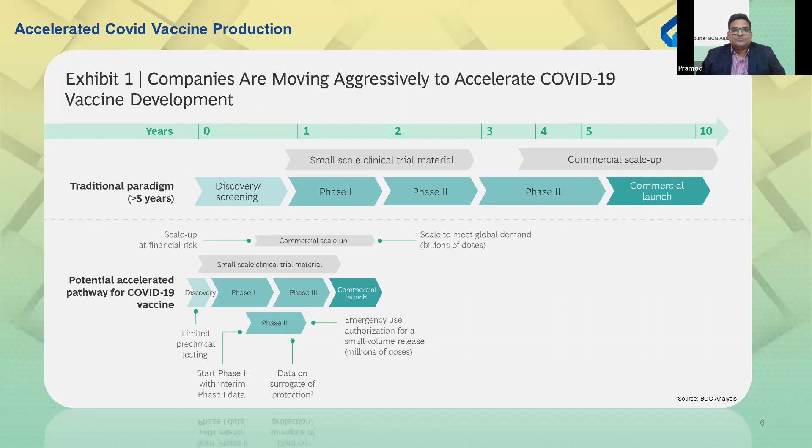So talking about different vaccine manufacturers, like Sputnik, or in India there are Covishield and Covaxin, which is a viral vector type of vaccine, and many countries were approved to produce the same vaccine to curb the spread of the corona pandemic. Across the globe, many more vaccines are practiced to control the corona infection. However, we need to understand what different coronavirus vaccines exist. So let's see the different coronavirus vaccines.

So basically, I would like to say that there is no laser pointer here.

So I would say there are direct action and indirect action coronavirus vaccines. In the case of the whole virus, which contains a weakened or inactivated version of the COVID-19 virus, this will be purified with the help of chromatography and chromatography resins. Those will be directly attenuated, so that they will have a controlled pathogenicity with the help of pharmaceutical excipients like preservatives. So, for example, dosage formulations in the form of vials or pre-filled syringes will be manufactured, and those will be directly injected into the human body.

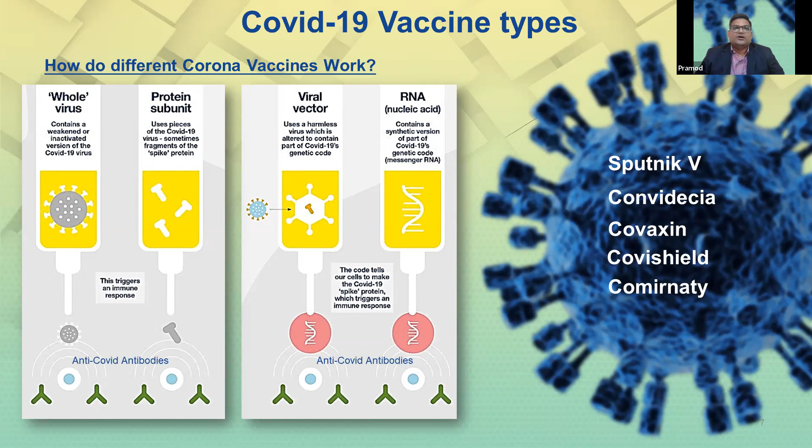mRNA vaccines do not use the live virus that causes COVID-19. The mRNA coronavirus vaccine is a kind of RNA or nucleic acid vaccine based on mRNA technology. It mainly introduces the mRNA encoding the virus S protein into human cells, letting human cells use the virus genetic information to produce the novel coronavirus S protein so as to stimulate the body to start the immune response. It does not affect or interact with our DNA in any way. mRNA never enters the nucleus of the cell, which is where our DNA is kept. The cell breaks down and gets rid of the mRNA soon after it is finished using the instructions.

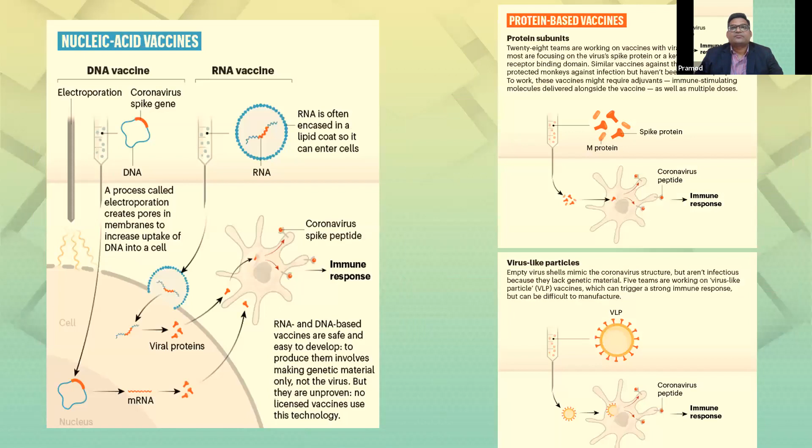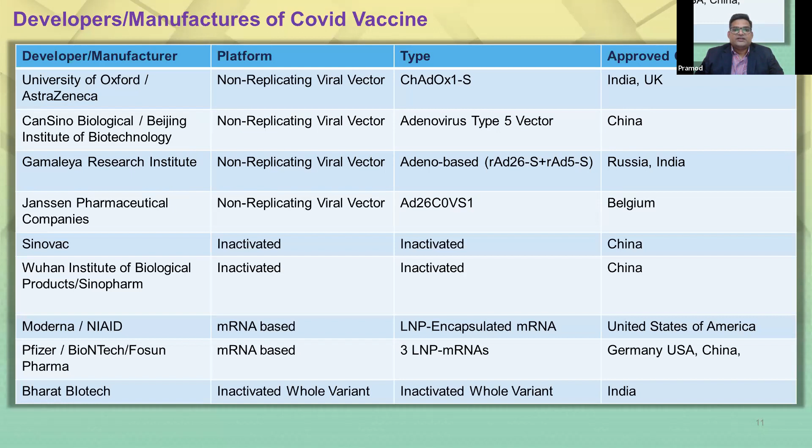Have a quick look at the list of COVID vaccine developers and manufacturers across the globe. Almost all biosimilar manufacturers have leaped into COVID-19 vaccine production. The vaccine categories include all the types of vaccines we discussed in previous slides, like mRNA vaccine, inactivated whole variant, viral vector, and some nasal sprays will also be available in coming days. Let us understand the common manufacturing processes involved in any type of vaccine manufacturing.

It always starts with the upstreaming of viral cultures. Nowadays, either stainless steel or single-use systems are used in the upstream processes. The main aim of the upstream processes is amplifying the viral count without losing the native form of the microorganism or virus. Once the fermentation time in the bioreactor is completed, we bring that protein soup or viral soup into further processing, and there might be some impurities. So we need to get rid of impurities, and because of that, the purification unit operations pitch in.

The first step will be cell lysis, either by homogenization or by other chemical processes, and then we can get rid of cell debris with the help of a continuous centrifuge or microfiltration with the tangential flow filtration method. Initially, the volumes are very high, maybe 5,000 liters or 10 KL, that is 10,000 liters. Handling these huge volumes is definitely a big task. To manage these volumes, we can reduce them with the help of ultrafiltration or affinity chromatography, that is protein A or protein G chromatography.

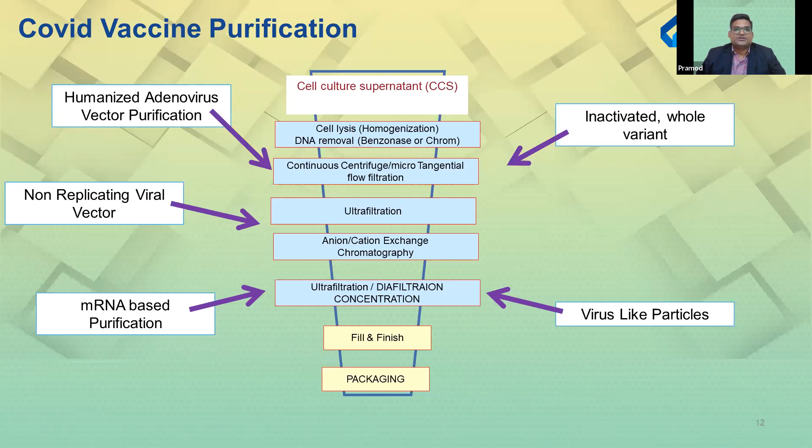After cultivation and reproduction of coronavirus, it is inactivated and then injected into the human body to stimulate our immunization. In China, there are many biosimilar manufacturers who have leaped into COVID-19 vaccine manufacturing and supplying them to different countries for better control over the pandemic. To name a few: China National Biotech Group, situated at Beijing and Wuhan, and a company called Sinovac, are involved in manufacturing COVID-19 vaccines.

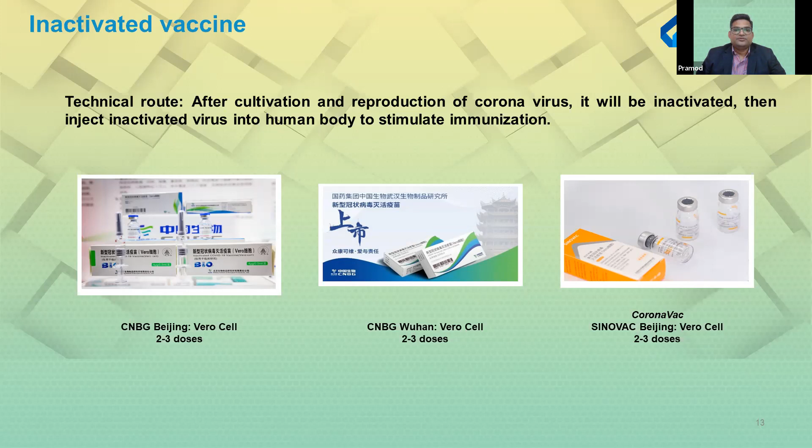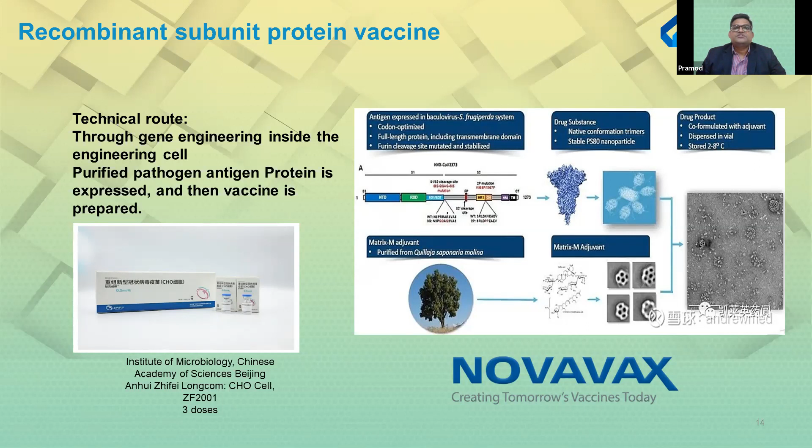In the case of recombinant subunit protein vaccines, the COVID-19 vaccine developed by Novavax is a recombinant subunit vaccine, meaning that SARS-CoV-2 components are created in the laboratory rather than isolated directly from the virus. The Institute of Microbiology, Chinese Academy of Sciences at Beijing and Anhui, are also involved in producing recombinant protein subunits which mimic the coronavirus, using a pathogenic fragment of it to give an immunogenic response in our body.

For example, AstraZeneca comes with this type of vaccine, approved in many countries to manufacture, like UK, China, India, and the United States of America as well. In China, Convidecia, CanSino Bio, also manufactures the recombinant adenovirus vector form of vaccine.

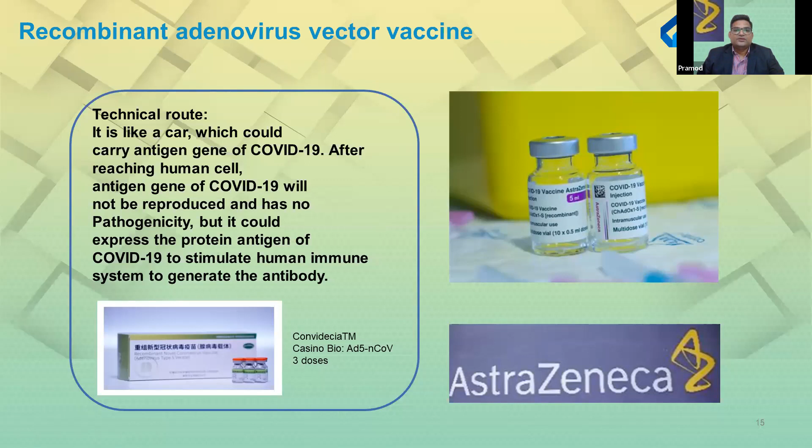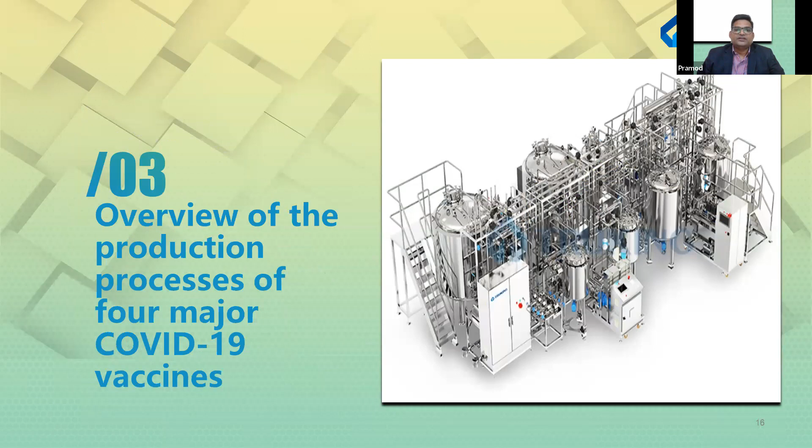Now, after giving a brief introduction about the different types of corona vaccines, let's see an overview of the production processes we discussed for COVID-19 vaccine manufacturing. This slide shows the manufacturing of inactivated vaccines.

The drug substance is created by first finalizing the cell lines, and there will be virus inoculation and fermentation of that viral culture in bioreactors, as I mentioned earlier, and further those are purified with unit operations like ultrafiltration and chromatography.

Further, the purified drug substance will be subjected to filling lines like ultrasonic cleaning, air injection, and pre-filled syringe filling lines. Those will again be transferred to the packaging lines, and TRUKING technology will help provide the filling lines and packaging lines as well.

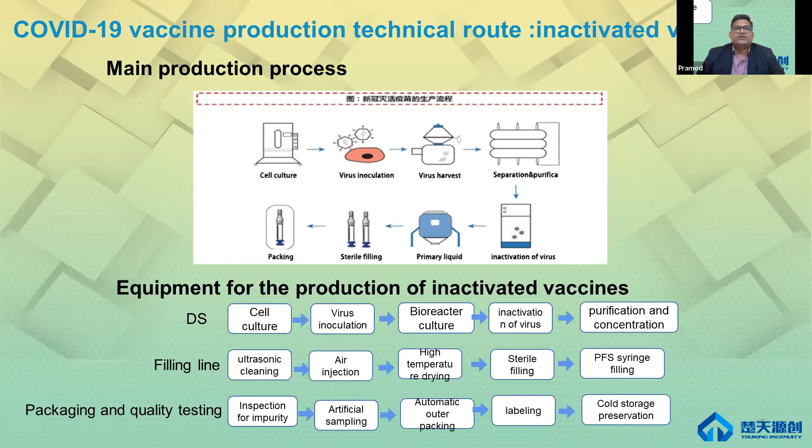Likewise, as we have just seen with inactivated vaccine manufacturing, the upstream process of vaccine manufacturing will be different, but the rest of the process will be the same. That will be downstream processing, and then the drug substance will be transferred to the filling lines and further for packaging and quality testing.

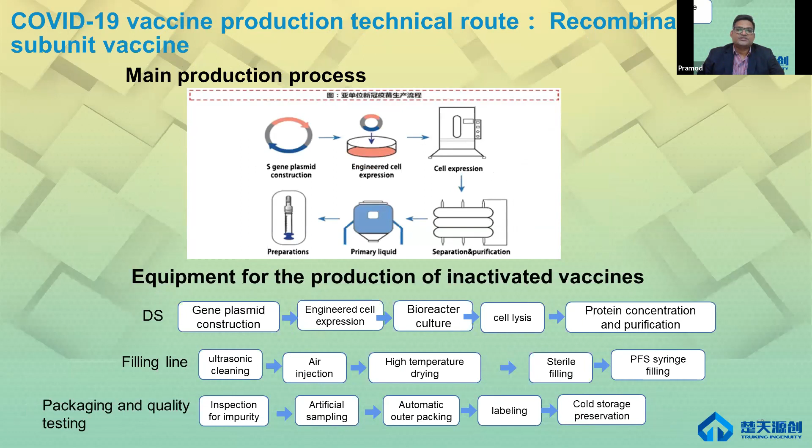In the case of mRNA vaccine production, as I mentioned, we need to select the target messenger RNA, which will eventually give an immune response through S protein production inside the body.

Then this particular mRNA will be amplified into multiple copies, and further those will be purified with the help of ultrafiltration and chromatography steps. After that, it will be transferred for lipid nanoparticle encapsulation technology to form the nanoparticles. The mRNA technology requires low temperatures to operate, and then the rest of the process of filling, packaging, and quality testing will be carried out.

So TRUKING technology is providing a one-roof solution for the entire process. Let's have a quick look at the entire process and offerings from TRUKING technology.

Talking about the overall process for vaccine manufacturing, there are different stages like media preparation and choosing the cell lines, creating the seed, and further seed amplification, or in the case of E. coli amplification, or viral cell culture amplification.

We provide various sizes of bioreactors, including stainless steel bioreactors, and we are well equipped to cater to biopharmaceutical companies with single-use bioreactors as well.

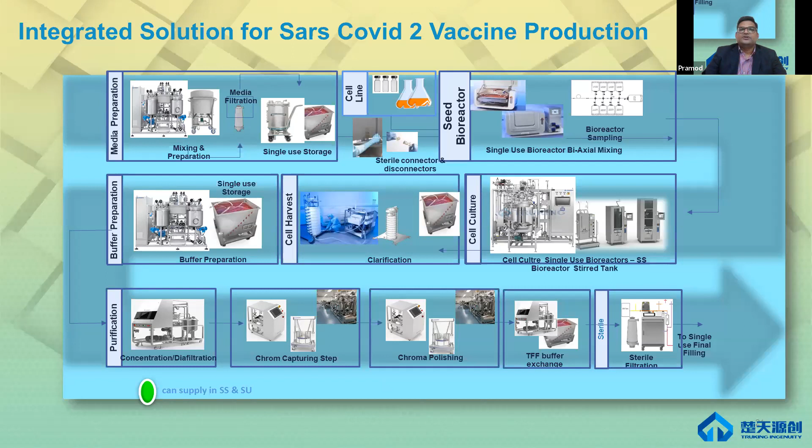I wanted to mention that the bioreactors or the chromatography systems provided by TRUKING technology can be supplied in terms of stainless steel, or as collapsible single-use bags.

Now let's study a case study for TRUKING technology. Let's take an example for vaccine manufacturing, where there will be upstream cell culture required, downstream purification, buffer preparation, and production preparation and filling.

TRUKING technology not only provides the hardware, but also process intensification equipment and technical support. TRUKING technology will also support you for your greenfield projects. In this project, we will guide you not only for the technical processes, but also the entire erection of a biopharmaceutical manufacturing facility. TRUKING will support you for the layout of your floor designs and optimum use of the facility.

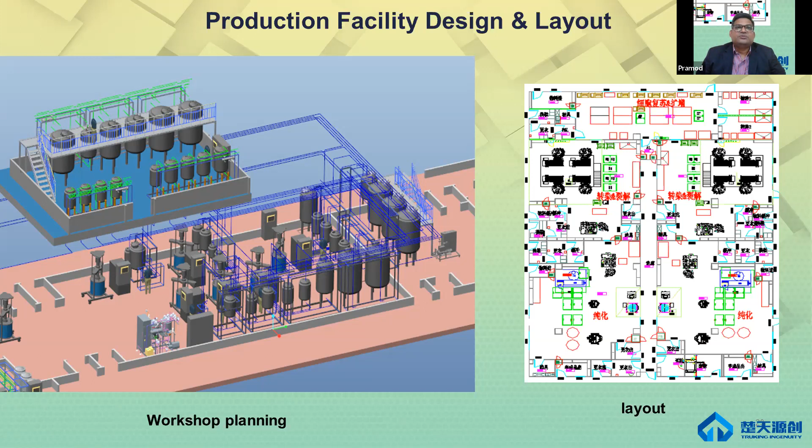This slide talks about the timeline required for each unit operation involved from upstreaming to the drug substance transfer. Initial inoculation will take around 2 to 7 days to grow into a good number. For further cell amplification into a seeding stage, it requires around 4 to 7 days, and the cells which are amplified will be put for the production scale, which will take around 7 to 9 days, or it depends on the cell line, going up to around 14 days as well.

Once this upstream batch is completed, at least around 2 to 3 days of time is required, as per the batch size and the level of purification. Then the drug substance so produced will be transferred to the filling lines and packaging lines.

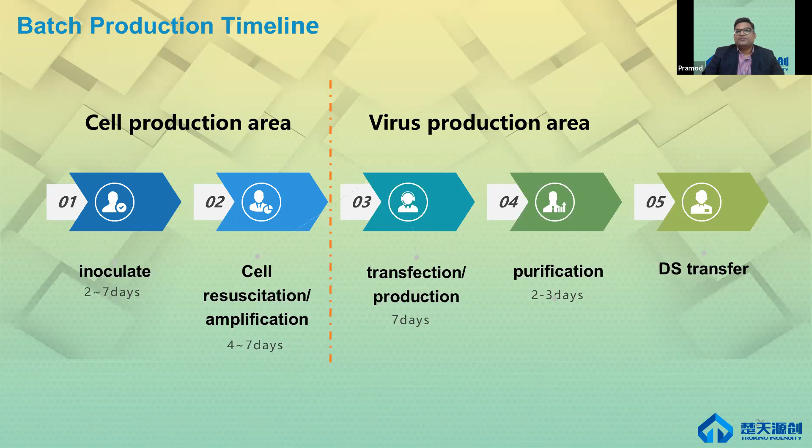Now, while doing the upstream or downstream processing, we need media. So media and buffer preparation are the basic unit operations in any biosimilar manufacturing, not only in vaccine manufacturing, but also in monoclonal antibody or insulin production. So we need media and buffer preparation there.

In case of cell seeding and amplification, which also requires media components and solutions like sodium hydroxide or sodium bicarbonate. For virus amplification, they require glucose solutions, acidic and basic solutions, and also surfactants like Tween 80 solutions.

For further processing of cell cultures like cell lysis, enzyme treatment, clarification, and CIP, that is cleaning in place for bioreactors as well as downstream equipment, we need buffers and CIP solutions. While talking about cleaning in place, that is the CIP, we widely use sodium hydroxide, which is cheap and very effective. Continuing with buffer preparation, likewise in upstream operations, we need buffers prepared for downstream operations as well.

For example, there are various phases of chromatography, and every phase of chromatography needs specific buffer requirements. Each chromatography run will have different phases like equilibration, sample loading, post-load wash. This post-load wash may involve wash 1 and wash 2, and further with the elution where your impurities and your protein of interest will elute out, followed by the cleaning in place of that particular chromatography resin.

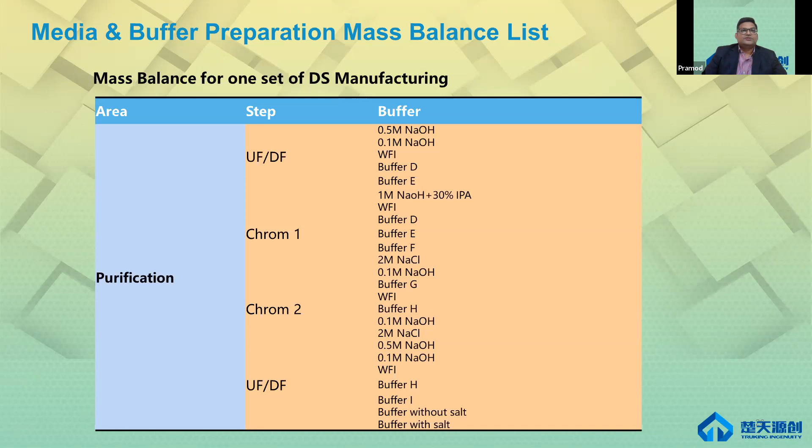So in the case of media preparation, what we need to do is weigh the media components, or nowadays premixes are also available, provided by vendors for your processes. Then we dissolve these into distilled or sterilized water, and all the components should be in sterilized conditions.

Once we have the sterilized media, we can put the cell culture media into storage, or pass it on to the reactor for fermentation processes. TRUKING technology will guide you, and we do have media preparation process equipment for your better use, so that it will not be a very time-consuming process, and you can be worry-free for your media preparation for every batch.

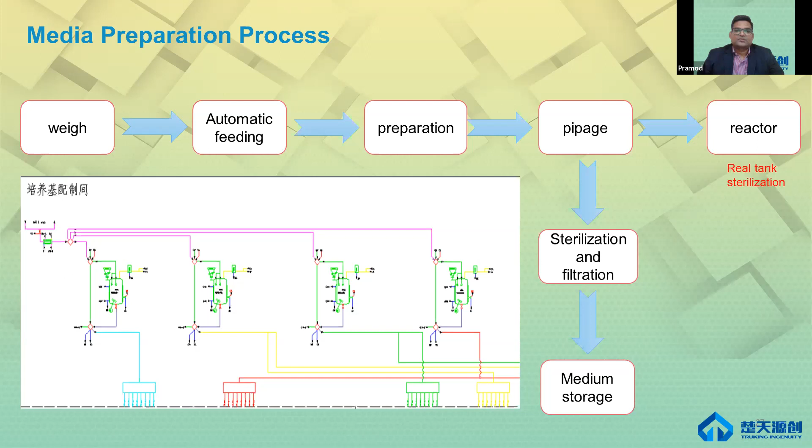Same as media preparation, we need to prepare the buffers for either upstream or downstream processes. The same process will apply: you weigh the buffer components, then dissolve them into deionized or sterilized water. To avoid further issues of increased pressure, it is better to get the buffers filtered through microfiltration units, and as and when needed, you can store it, transfer it to the above tanks, and carry out the operations.

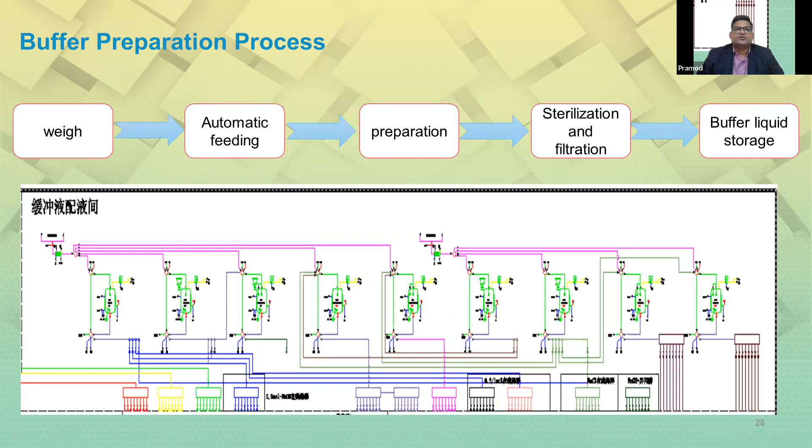The tough points in the buffer preparation process are mainly maintaining the media buffer preparation tanks, and cleaning and sanitizing them. It is a time consuming process. These are the major hurdles in day-to-day activity, and they definitely consume a lot of time, resulting in less productivity for your facility.

From TRUKING technology, what we can offer you is process intensification equipment, that is the buffer preparation hardware like liquid dosing systems and inline conditioning buffer preparation systems. There is hybrid technology like the inline conditioner buffer system, which is equipped with column valves and carries out the function of a chromatography system on these instruments. I will be talking about this equipment in the coming slides.

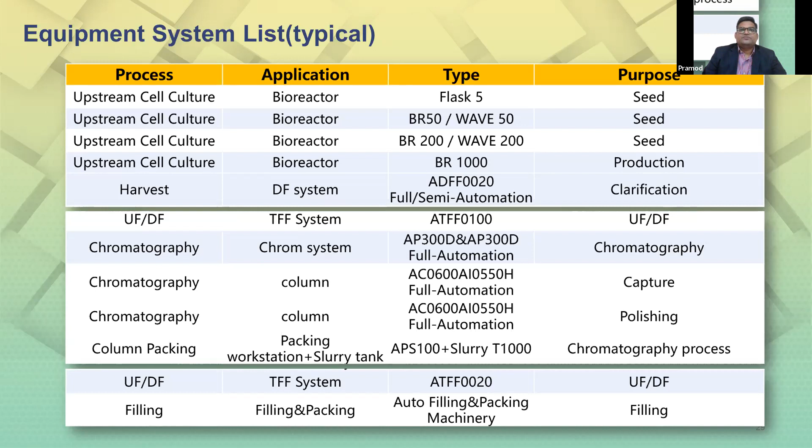In the case of upstream operations, we always start with the seeding of your cell culture. For seeding purposes, you can use a smaller flask or a different bioreactor, for example a small bioreactor of 5 liters, or a rocking platform where a 50-liter bioreactor can amplify your cell culture up to 200 liters, and then further you can inoculate your amplified cells for the production batches. These bioreactors that TRUKING provides range from 20 liter, 50 liter, 100 liter, and 200 liter for seeding purposes. As per your requirement, you can definitely make use of it.

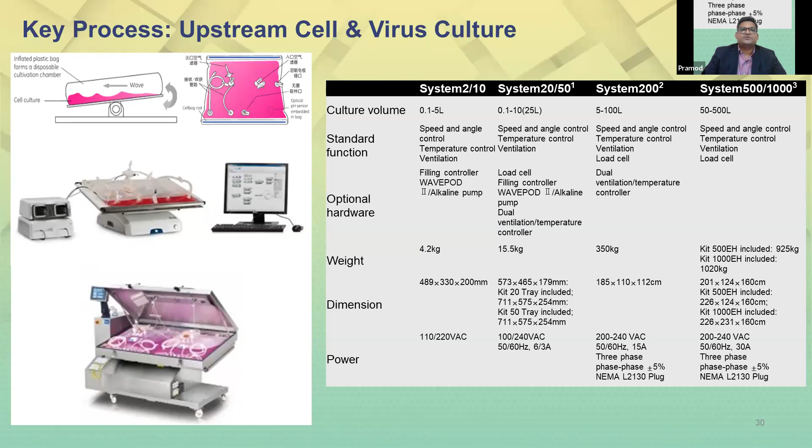In further operations, we look at mostly non-specific or specific purification technologies, for example ultrafiltration and chromatographic operations. For ultrafiltration, TRUKING technology offers tangential flow filtration hardware systems where, as per your need, you can attach micromembranes for microfiltration purposes and ultrafiltration membranes for your ultrafiltration purpose. This ultrafiltration and diafiltration hardware is also very much compatible with various vendors' membrane cassettes for cross flow filtration fiber. These can be easily fitted and you can carry out the operations as well.

In the case of chromatography systems, you can combine the chromatography system with chromatography columns and carry out a purification operation. For the chromatography system, we have different flow rate variations, for example starting from 180 liters to 2000 or maybe 2400 liters per hour. Recently, in a special case, we provided around a 12,000 liter per hour system in China as well. For the autocolumn, the diameter range starts from 30 centimeters to 1.6 meters, that is 1600 millimeters in diameter, which you can use with our autocolumn.

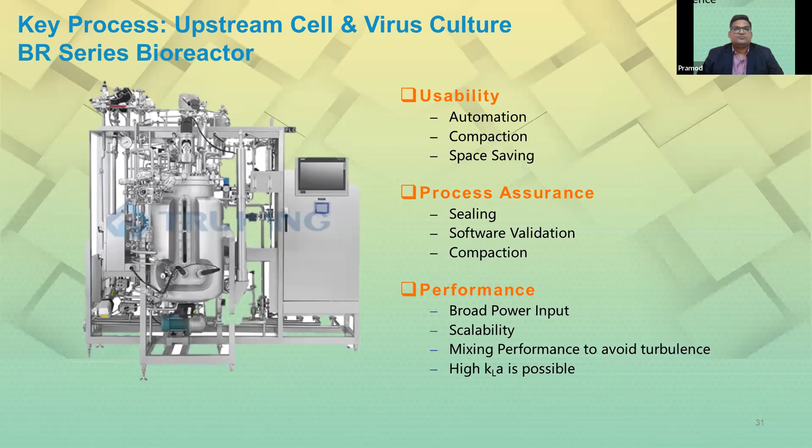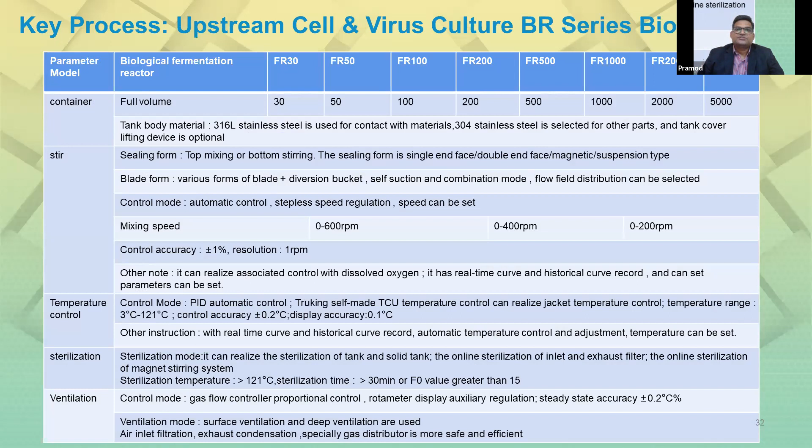So these are the exact specifications of bioreactors from 30 liter to 5000 liter. In these bioreactors, with the help of software, we can better control the speed of aeration or gases, and pH and temperature sensors are also available for accurate measuring. We do have the defoaming electrodes, which will detect the foaming or frothing happening inside the fermentation processes.

The conditioning and the preparation tanks can be utilized in various applications, like cell culture media preparation, buffer preparation in upstream and downstream processes, and in semi-finished products as well. So these conditioning and preparation tanks are enabled with load cells, which can give you a better idea about the weight of the liquid, and they are also enabled with temperature control, and you can attach CIP and SIP systems for further sanitization purposes.

So these media preparation tanks can range from 200 liter to 1000 liter, and the storage system can range from 50 liter to 1000 liter.

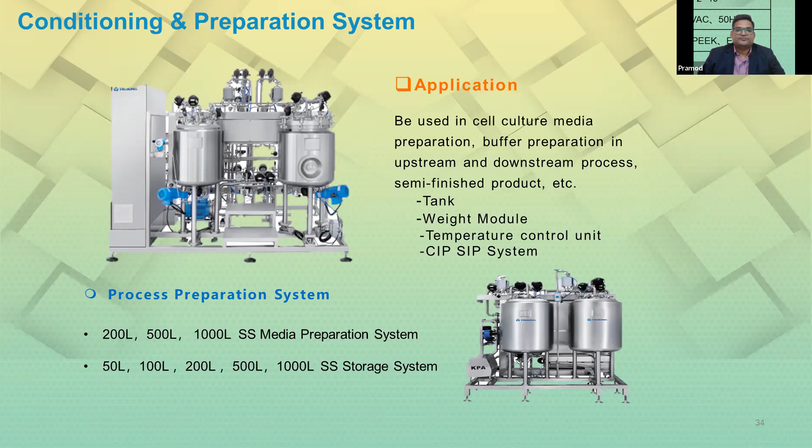After the cell harvesting and the cell lysis, the fermented soup will be further clarified with the help of depth filtration. TRUKING Technology is offering you the hardware for depth filtration systems, which are enabled with inlet pressure monitoring to control the delta pressure, which eventually controls the pressure coming from the storage tanks or the preparation tanks. It will control the flow of liquid at the inlet and avoid the siphoning effect of the fermented soup.

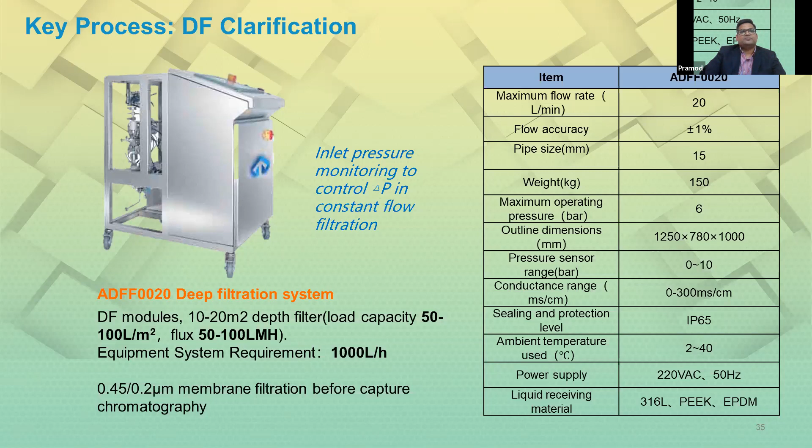Along with that, the depth filtration unit also has constant flow filtration, and constant pressure flow options are also available. Depth filtration clarification systems can be operated at a maximum of 6 bar, or approximately 87 psi. For depth filtration modules you can attach, for example, a 10 to 20 meter square depth filter, and you can easily have a load capacity of 50 to 100 liter per meter square. The flux can vary between 50 to 100 liter per meter square per hour.

Again, for the concentration or the diafiltration, that is the buffer exchange, and for some non-specific purifications, we can use ultrafiltration unit operations. TRUKING Technology offers a state-of-the-art unit equipped with equally good software, which has better controls over constant flow operations, or you can also monitor the constant pressure or the constant flux. So whenever there is fouling of the membrane modules, you will be alarmed or notified.

Also, along with the constant flow, constant pressure and flux, you can also keep an eye on the constant transmembrane pressure for better control of the permeate coming out of the ultrafiltration modules, like a hollow fiber or cassettes. This ultrafiltration unit can operate at a maximum of 6 bar, which I think is a very good pressure limit for membrane assemblies available in this market. For this ultrafiltration unit, you can fit either the membrane cassettes or the hollow fibers.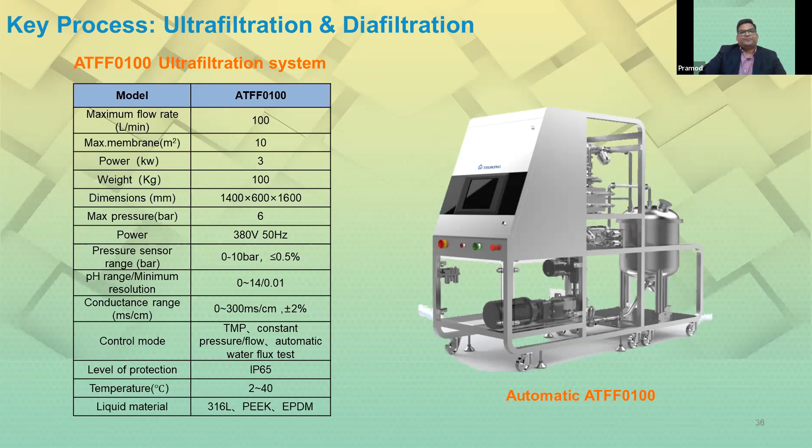The chromatography systems from TRUKING Technology are another flagship product offering for biopharmaceutical products. We have installed many of these chromatography systems in India as well, for example, the Serum Institute of India, Bharat Biotech, Dr. Reddy's, and many more biopharmaceutical companies here in India.

These chromatography systems come in various flow rates as per the customer need, from around 180 liters to around 2400 liters per hour, and we can also build a specific chromatography system as per your need. The maximum operating pressure for this chromatography system is again 6 bar. This chromatography system comes in two variations, single-use flow paths and stainless steel flow path. As per your need, we can provide those for your application.

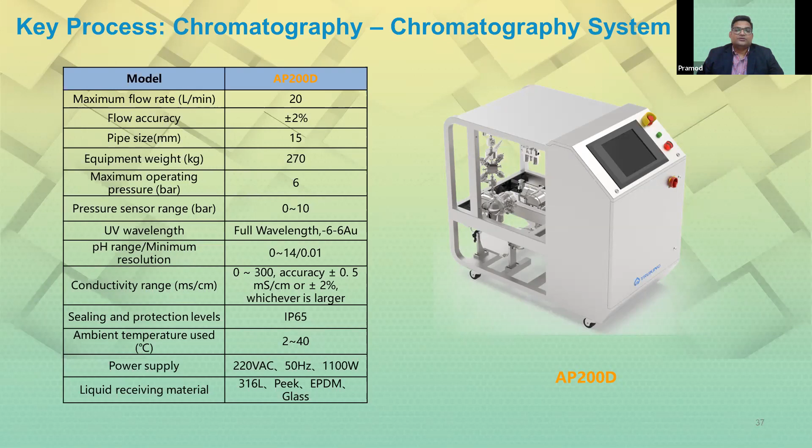So when this chromatography system has a single-use flow path, the same system can be used for a multi-product facility with a very short turnaround time. TRUKING chromatography systems are operated through the PuriCat software. This PuriCat software is 21 CFR Part 11 compliant, which means that there will not be any tampering in any of the run logs which are captured, and this is a very important auditable issue for any of the manufacturing projects.

If you see this PuriCat software screenshot, you can see that it is very intuitive. There are inlets like SA1, SA2, SB1, SB2, and there are two pumps, pump A and pump B, and in the flow path you can see the bubble trap, and a couple of sensors like the pre-column pH sensor, the conductivity sensor, and the pre-column pressure sensor.

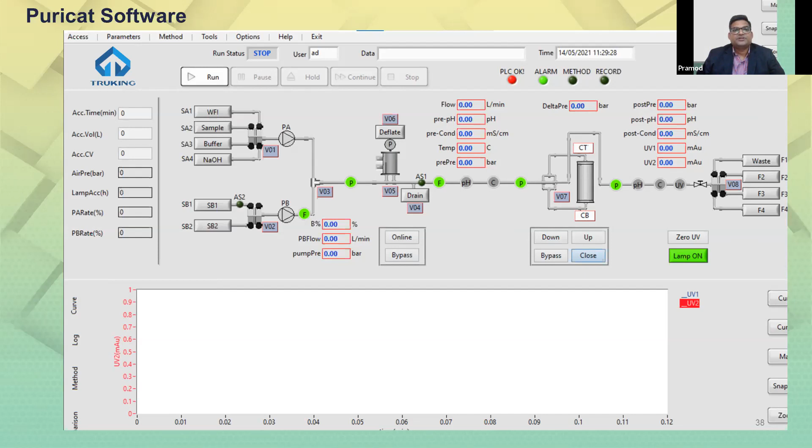And then there will be a column where you will have the options of downflow and upflow, and after the column there will be post pH, post pressure, and post conductivity, followed by the UV sensor, which is available for your elution purposes.

As you can see, this is an interactive area where there are different regions, the legends like UV1 and UV2, and there might be a conductivity or pH. The actual chromatogram you can see in this thing, which is exactly happening at a particular time interval.

The previous runs can be overlapped with the current chromatogram, so that we can see how our run is progressing and what will be the conductivity or the pH, or any of the changes occurring in the runs which happened previously and in the current runs. We can easily compare, so that we can take better control of the chromatography run.

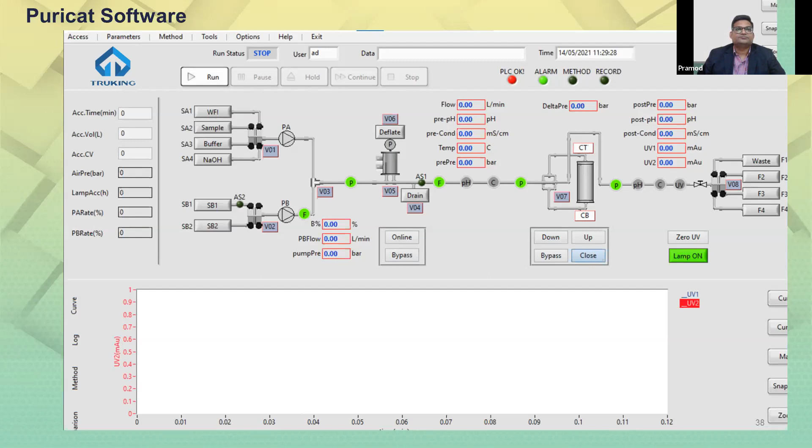In this PuriCat software, we do have the basic settings where, as per your choice, you can turn on or turn off the valves or any of the sensors if you have a specific need for your particular run. The column diameter and the bed height, if you put them over here, then you can easily calculate your column volume.

And then we do have the alarm settings, where we can enable specific values like the pre-pressure high alarms, pre-pressure low alarms, and you can put different ranges of values for a particular region like temperature alarms, the air pressure or the air sensors. So you can put your values, and after giving these alarm commands, your chromatography run will be under continuous watch until it completes.

And by surpassing these alarm commands, it will definitely intimate you that there is a high pressure or a low pressure, and you can take better control of your systems. So there are these pre-settings where you can keep valves open, and you can further check which valve to open when you are going to start your system. So there are multiple options available in the PuriCat software.

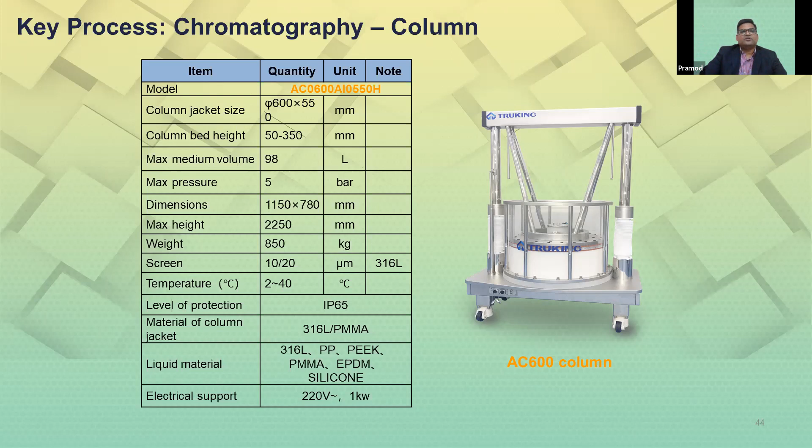These columns have a patented mechanical structure design, where the triangular mechanical structure strengthens the overall equipment and makes the equipment simple, lightweight, and safer for use. The design pressure for this particular column is around 5 bar.

You can see over here the traditional design of the same range of column from different vendors, where the top adapter is operated through the central shaft, which has an imbalance across the higher diameter columns. Because of this imbalance, no millimeter accuracy can be achieved. While in the case of auto columns, there are 4 points holding the top adapter, which facilitate the up and down movement of the top adapter, giving the perfect horizontal position, which results in millimeter accuracy for these auto columns.

So these auto columns have two synchronized servo motors, which control the up and down movement of the top adapter. These auto columns also adopt the hoisting method on their own. That means you don't need any extra space for the maintenance activities.

Because of the hoisting method, this auto column occupies a very small area, resulting in savings in manufacturing space, and it is very convenient for transportation. It only takes around 15 to 20 minutes to disassemble the entire auto column.

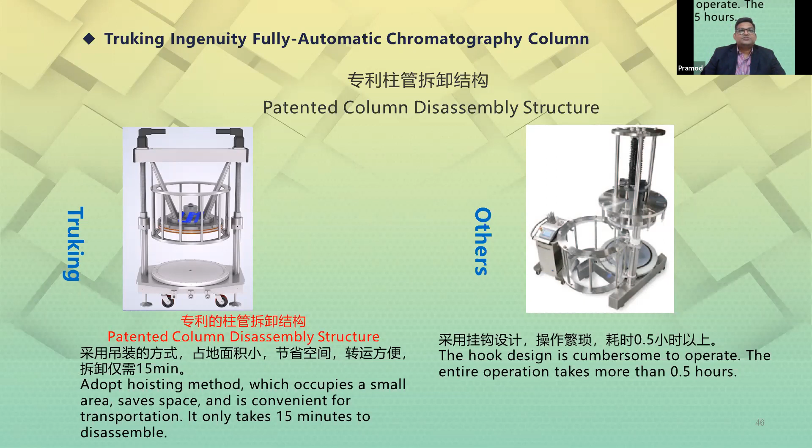While in the case of the traditional design, the column tube will swivel out, and because of that, you need to keep extra space for the maintenance activities, and it requires a little more time for disassembling the top and bottom adapters.

Just to check the flow distribution inside the column, we have given multiple red dye injections, 5 to 6, at equal time intervals, and the flow was given from upward towards downward, and you can see that after every injection a very solid and compact red ring is formed.

Just to check the inside flow distribution, we have scooped out the cake, and we found that there is a very compact formation of red dye color for every pulse of red dye injection given at a particular time interval.

And also you can check the column qualification criteria, where there will be around 7,400 plates per meter, and the asymmetry value is 1.07, which is a very high standard value for chromatography column qualification.

We have used the chromatographic media from JNC, a company from Japan. The name of the media was Cellufine GCL2000.

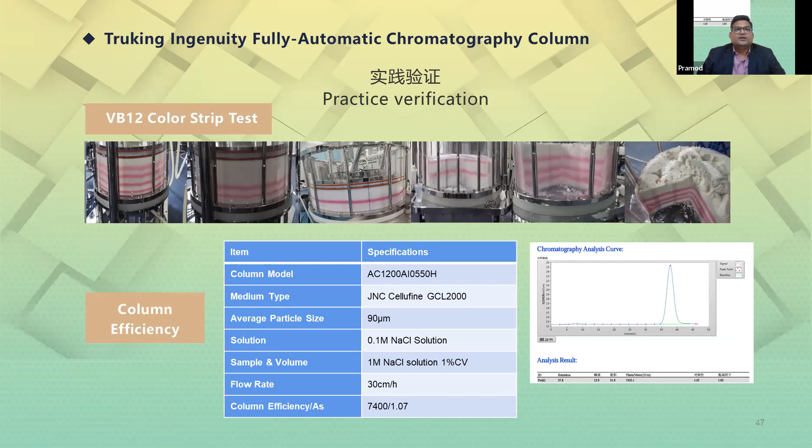The auto column from TRUKING Technology is a combination of two methods, that is pack in place and also syringe action axial compression packing of resins. As per the client requirement or the chromatographic resin demand, we can use a pack in place method,

or you can also pull the resin slurry with the help of a syringe action during the upward movement of the top adapter, and then again compress the resin by bringing the top adapter back towards the down position, further compressing the resin bed and achieving the desired bed height with millimeter accuracy and accurate compression factors.

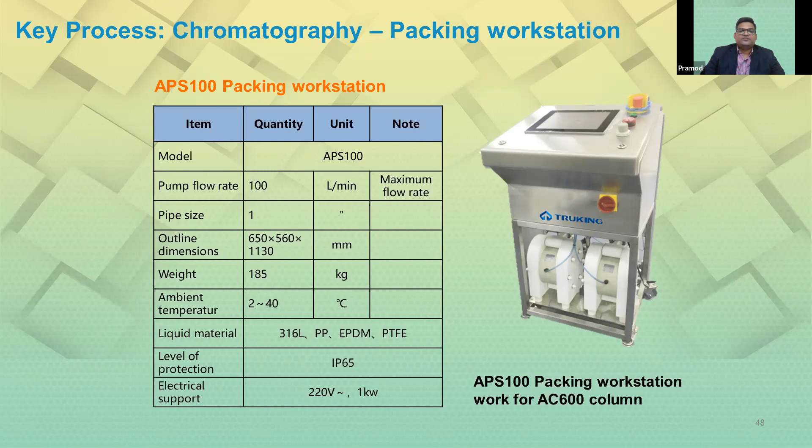Along with these chromatography systems and chromatography columns, we also have slurry tanks for homogeneous mixing of slurry and for the packing of chromatography columns. The impeller we use in the slurry tank is a helical structure, so that minimum stress is given to the beads and the cell lines as well, and still the resin will be in suspension in a homogeneous state.

As per need, we do have different volumes. For example, we can supply you around 1000 liters volume for the slurry tank. These tanks come with the CIP and SIP-able option and have proper documentation for audit purposes.

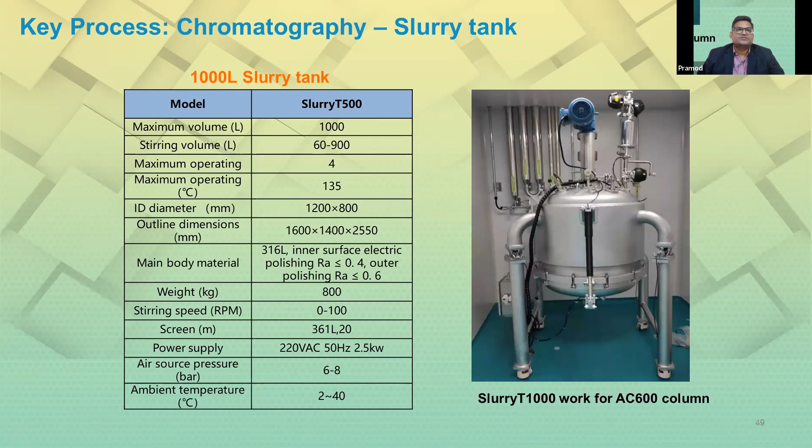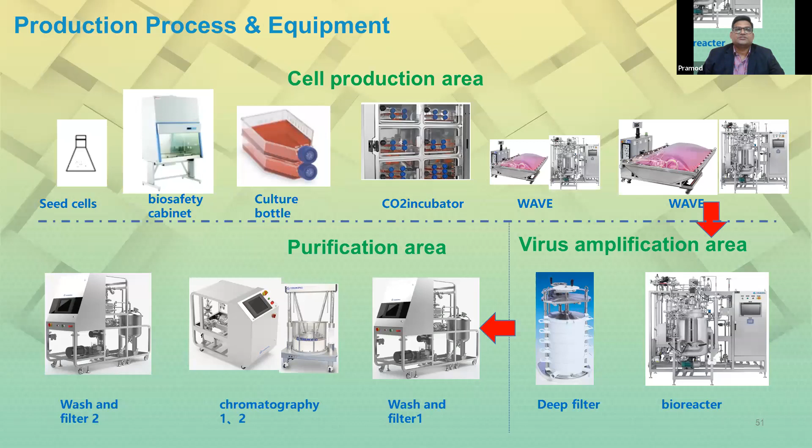So overall, TRUKING Technology is providing you a unique combination of state-of-the-art process intensification equipment for bioprocessing projects, which includes upstream and downstream operations.

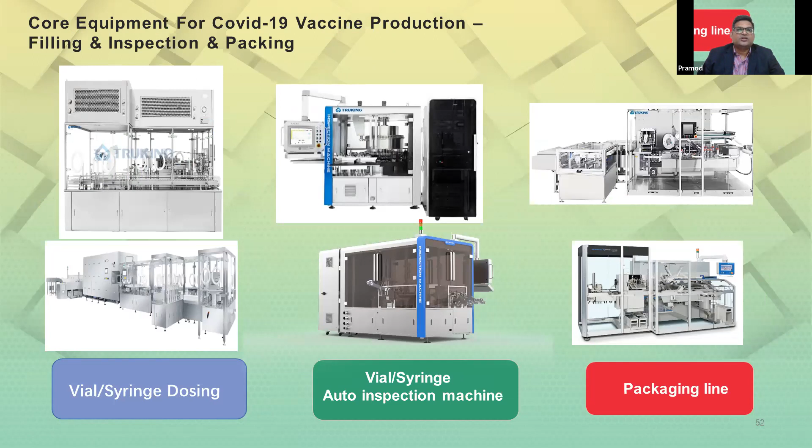Along with the bioprocessing unit operations or equipment, we have an eminent presence in liquid dosage form systems like vial or syringe dosing, and auto inspection machines for vials and syringes are also available, and packaging lines along with lyophilizers are also available.